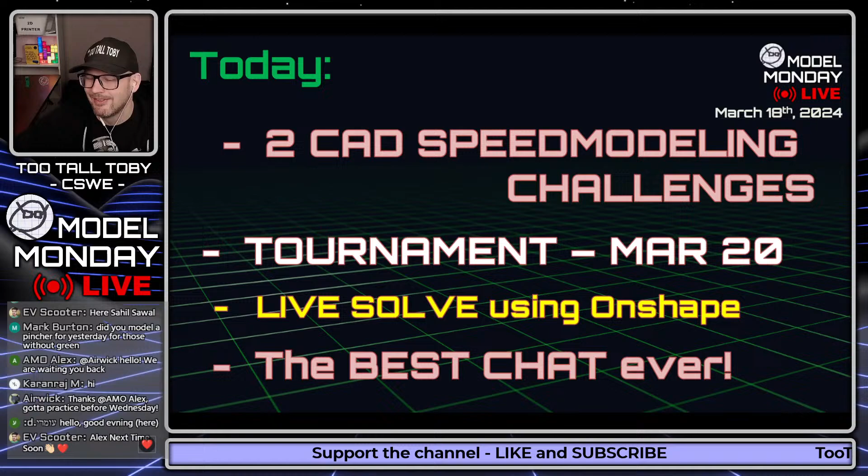Today we're going to do 2 CAD speed modeling challenges. We're going to talk about the tournament this Wednesday. We're going to do some live solve using Onshape, very excited about that. And of course we're going to hang out with the best chat ever. You guys are indeed the best chat ever, so don't forget that as you go through your week, as you go through your month, you are indeed the best chat ever. So just remember that. All right, here we go.

Let's do this baby, the live solve, I'm going to do this one. This is the drill mount. We posted this in the practice models a couple of weeks ago. There were a couple of people who were asking about this. Jonathan said, love to see a tutorial in Onshape with this one. And BMNDJD said, I'm struggling with the placement of the 42 millimeter radius. So we'll take a look at this in Onshape today, we'll do a live solve in just a little bit.

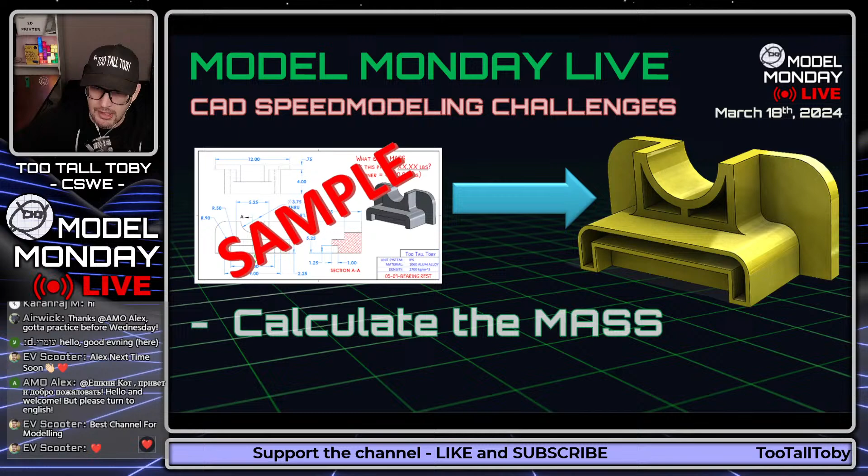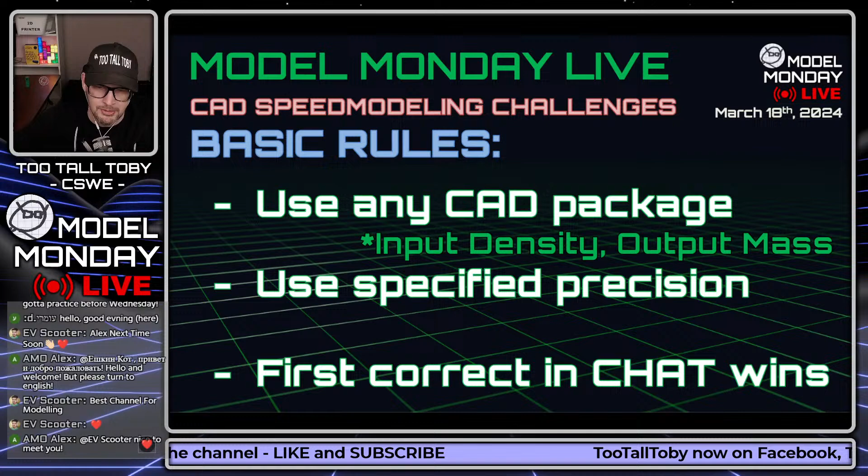But for you guys, I'm going to show you a 2D print and ask you to turn it into a 3D model. And you're going to try to calculate the mass and then enter that mass directly into the YouTube chat. Whoever is able to do that the fastest using any CAD package will be declared the winner. Make sure you use the specified precision, and the first correct answer in the chat will win.

These are the units we're going to be using today: IPS, MMGS, plain carbon steel, 1060 aluminum alloy, and ABS as the materials, and these are the densities. If you're here for the first time, take a screen capture of this page because you're going to need these materials anytime you do the practice models or the tournament.

EV Scooter says, SolidWorks Tricks Short is amazing. Awesome, glad you've been enjoying that.

Mark Burton said, been using your practice models to learn Alibre. Nice, very nice, we love the crew over at Alibre. There's a bunch of Alibre users here in the chat as well, regulars on the show, so I'm sure they'll be happy to answer any questions you have. You can also ask them in the TooTallToby Discord.

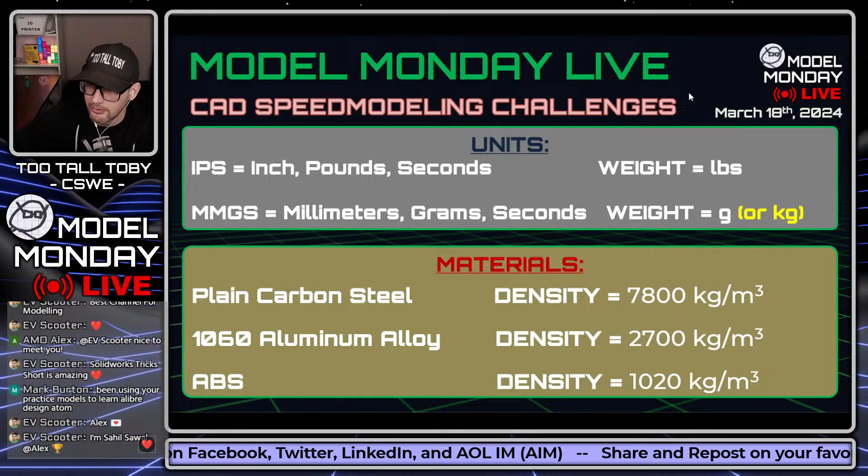All right guys, here we go, let's get into this first challenge. This is one that comes from the tournament, but that we didn't use, at least I don't think we used it. If we did use it, I hope somebody out there will say, hey Toby, your memory is not working good. Let me know. But I think this is a new one for all of you. Here we go, this challenge begins in 3, 2, 1, go.

What is the mass of this part in XXXX grams? Ross getting here just in time, we are just launching the challenge. Welcome, welcome. So what is the mass of this part in XXXX grams? The tolerance is plus or minus 1 gram.

Kind of a cool little part, it's a tier 4 part. There are some tricky elements to this. You have to locate that C-bore correctly, or else you're not going to be within tolerance because of how that lower face is slanted. So kind of a cool little part here. I think it's one of these parts that looks pretty easy at first, but it's going to take a little bit of thought to get all of your dimensions, all your features in the right places.

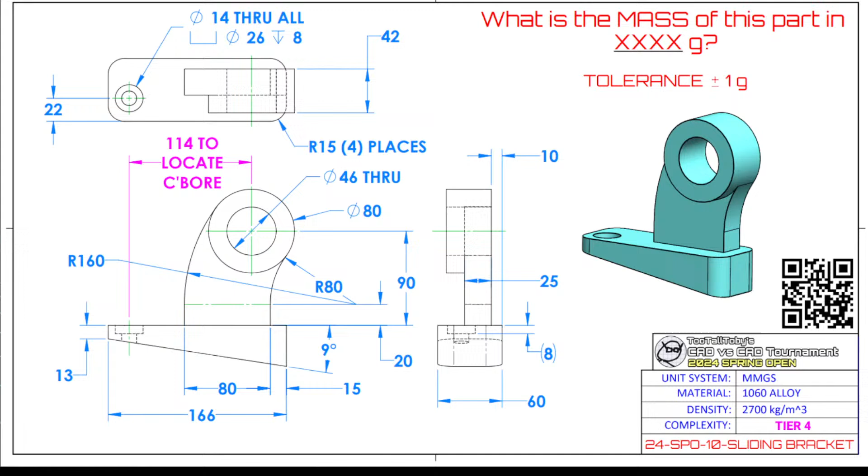So good luck to everyone on this. Take a screen capture, a 2D screen capture, use your Windows snipping tool, or use something to grab a 2D screen capture of this and put it onto your second monitor, and you can begin modeling. This is a model that was on the wheel for the tournament during the round of 16, but never got picked. Sad, it never got picked. But it's happy for us, it means we get to use it here in Model Monday Live. So take a look, good luck, take a screen capture, put that on your second screen.

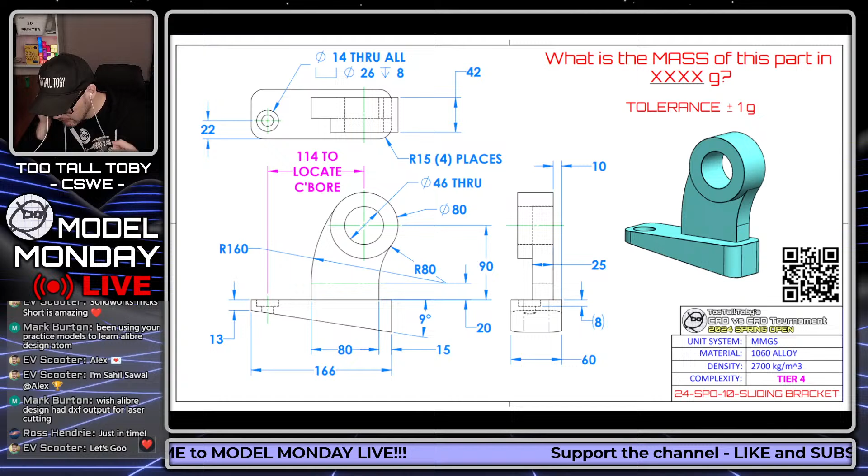And we are going to get back into the action here. This song gets me pumped, I hope the music sounds good. Let me do a quick audio check here on my second. The music can maybe be a little louder, let's see if we can bump this up a little. We're doing a lot of stuff here, we're wearing several hats on this live stream. I think that's probably pretty good right there, I like that, I like that sound, I like that level, it's a good level.

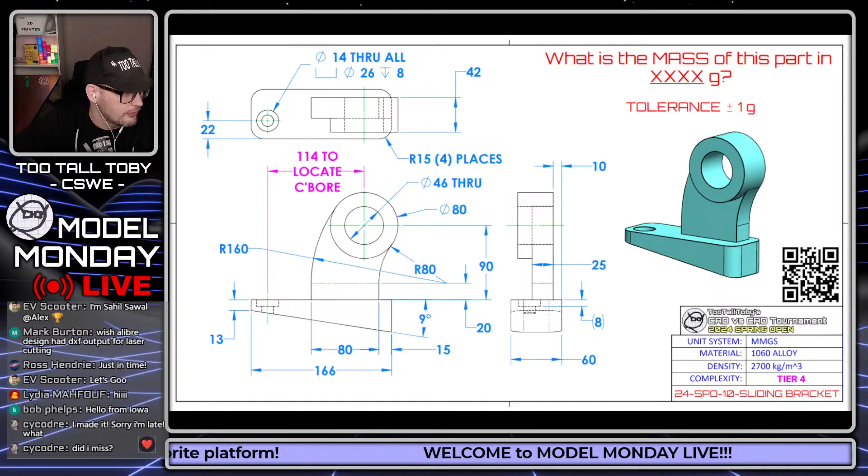No problem, what did I miss? Not much, just the first model. I'll show it to you real quick, you can grab a screen capture, just for you, special for you. Take a screen capture and you can try to model that using any CAD system that you want. I'll leave it up for 5 more seconds while I take a sip of my water.

Wow, Victor K already coming in with an answer. Victor K is the world champion of 3D CAD speed modeling. It's Andre. What's up Andre? Welcome, thanks for joining us.

All right guys, let's talk about some news in the world of TooTallToby, the next tournament. So obviously the tournament is concluding this week, March 20th, the finals. Huge congratulations to our Final Four. We got Imants versus Dom in the first match, and then we got Airwick versus Chrisbco in the second match. Very, very cool, so huge congratulations to our runners who made it to the Final Four.

When is the next tournament? We're not going to do a summer tournament. We had some internal meetings here at TooTallToby Labs, and we decided that we're not going to do a summer tournament. We're going to just wait and put all of our efforts into the World Championship 2024. We were planning on maybe stacking a quick summer tournament in between the two, but it just feels like it's rushing a little bit too much to jam one additional tournament in the middle there. We figured it'd be better off putting all of our effort into getting ready for the World Championship this year.

So be on the lookout for that World Championship, be on the lookout for the registration, the qualification. We'll see all that stuff going up in the next couple of months. Between now and then, what you can do is go to TooTallToby.com and go to the leaderboard and practice the leaderboard. There's a March leaderboard up right now.

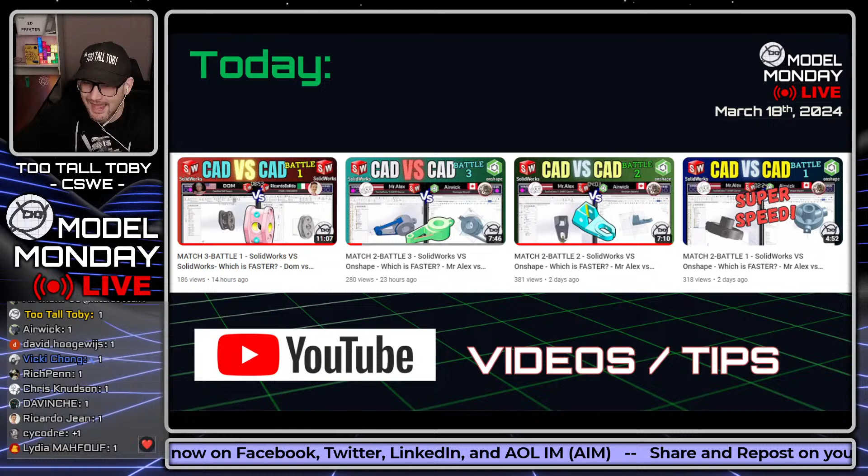For the past few days I've been posting all of the episodes sequentially of just the battles from the Elite 8, starting with the very first match and going all the way through. I'll finish up tomorrow posting the final battles. All of the Elite 8 battles are posted on one playlist on the TooTallToby YouTube channel. It makes it a little more exciting to see what's going to happen on Wednesday as we enter the Final Four.

Someone mentioned the shorts in the chat. Yes, the shorts are epic, we're on day 63. We've been doing a new short every day with SolidWorks tips, really CAD tips - it doesn't all have to be SolidWorks. There's going to be other tips in here too, Onshape tips, Alibre tips. It's just all SolidWorks right now because I've acquired a huge library of tips and tricks for SolidWorks, and I'm trying to get them all out there to make your life a little easier.

Ross in the chat says, gotta love a SolidWorks crash. Yeah, I'll bet you do. Something I never seem to miss when I'm working in Onshape - I never seem to miss the SolidWorks crash, losing my work. Doesn't really happen in Onshape. Everything you do in Onshape is insta-written to the database essentially, so if your whole computer has a catastrophic meltdown, you can just jump to the next computer and you'll be right where you left off. It's pretty awesome, there's no save button.

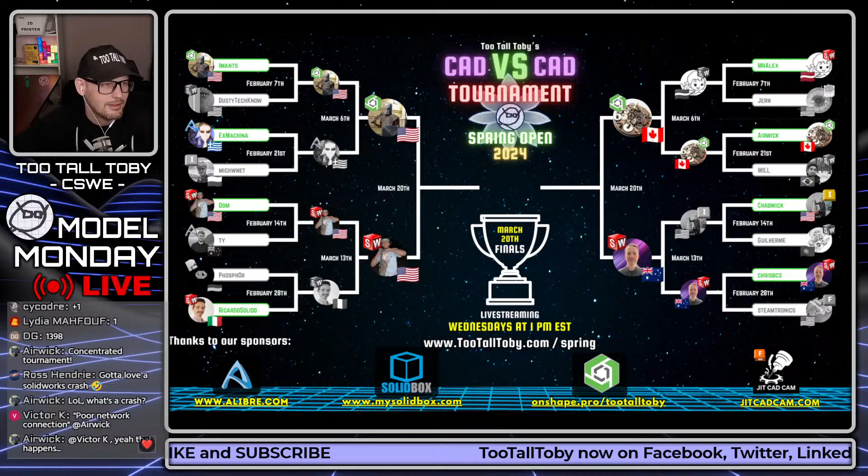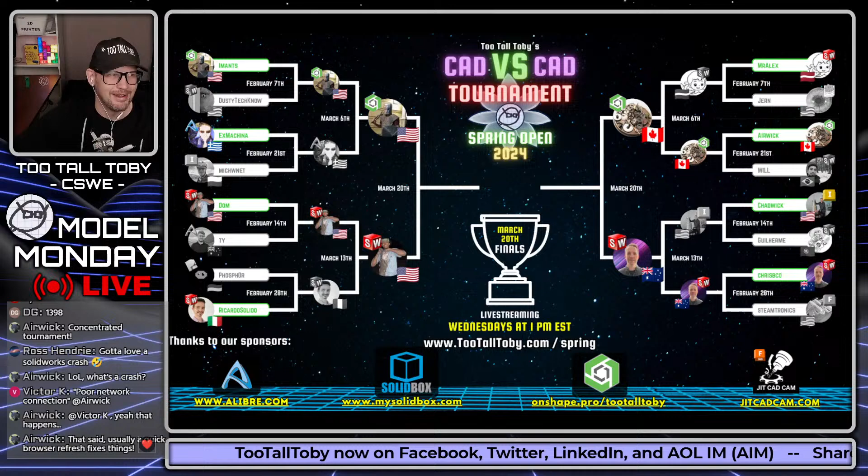Will it be a clean sweep? Will one CAD system completely defeat the other? Who knows, we'll see what happens. Or are we going to see a SolidWorks versus Onshape showdown in the finals, which we've seen before - we saw that 2 years ago in the World Championship. So we'll see what happens here. It's going to be awesome. I'm very excited, I couldn't ask for a more exciting batch of people to be in the Final Four.

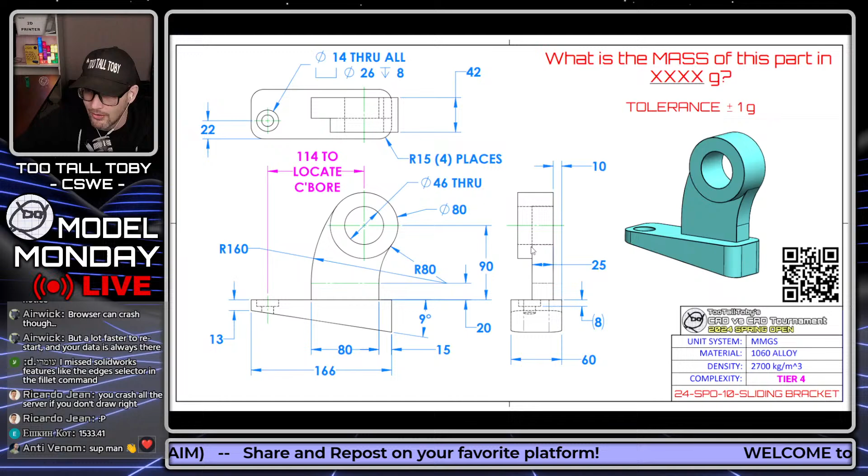Let's take a look at this first answer. Anti-Venom in the chat, what's up my man? Long time no see. Welcome, welcome.

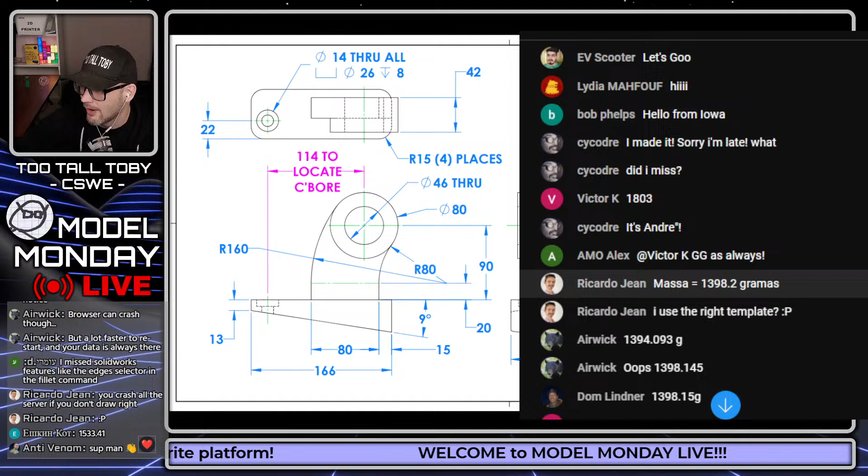Let's see how we did on this first one. Looks like it was Victor K who came in with the very first answer, 1803. Victor K is the world champion of 3D CAD speed modeling and he is continuing to dominate. Ricardo Jean coming in, 1398. Ricardo Jean put in an outstanding performance last week, but suffered a real heartbreaker with regards to a little unit issue, creating a model in millimeters that was designated as being in inches. And how many times have we all done that? I know I've done that plenty of times myself. So that was a real heartbreaker, but Ricardo Jean is very fast, one of the strongest competitors in the tournament.

1398, very nice. Airwick, 1394. Airwick saying oops, 1398. Dom, he's in our final. Airwick and Dom are both in our final 4. 1398, Victor K, 1398. Oh, Victor K revising, I like it. Somehow put 19 degrees instead of 9. Dope. All right, let's see here. DG, 1398, very nice. Omri coming in here, 1398, very nice, very nice.

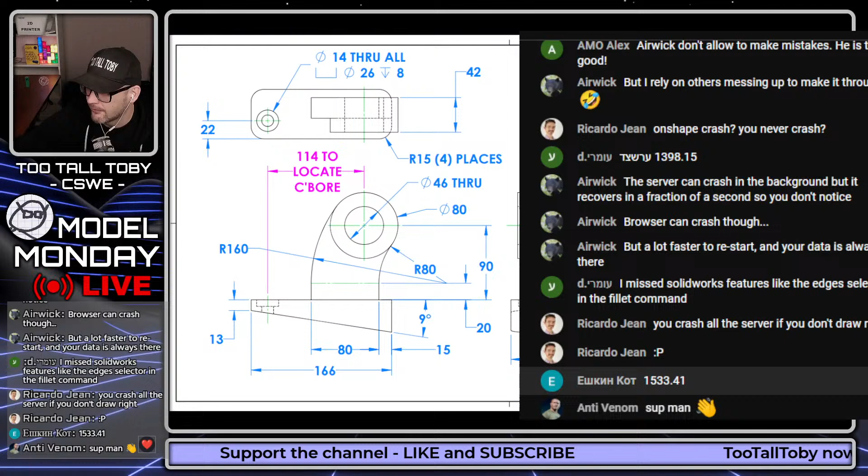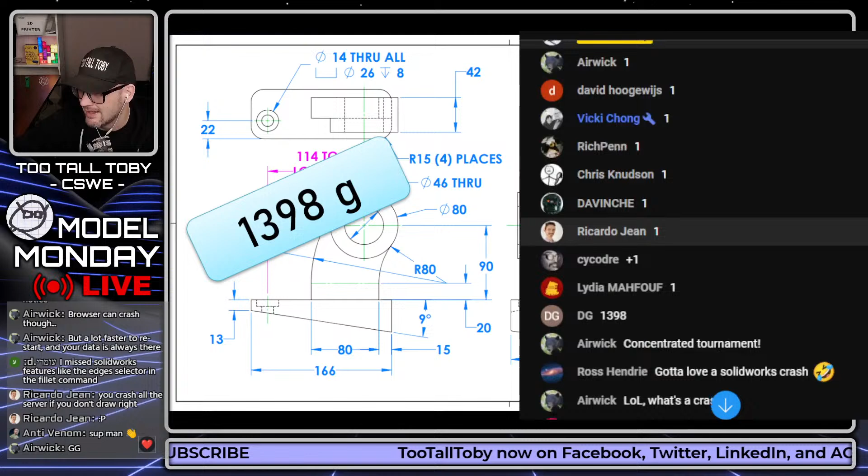And our friend from Russia, 1533, very, very nice. Anybody who got through this model in that short amount of time, very impressive, very well done. But there can only be one winner, and that winner looks like Ricardo Jean. So GG to Ricardo Jean, 1398 is the correct answer. Let's see here, here he is, Ricardo Jean, very nice, mass of 1398. GG to Ricardo, he earns a point for this matchup. Well done, well done, very nice.

And good job to anybody who finished that model. That's a tricky model, not easy. Congratulations on doing that model.

But it's not over. Oh, Rock Crawler's here. Rock Crawler, what's up? Sorry about logging into that other stream at the start. I saw you in there at the beginning, you were like, hey, why is everybody over here? So yeah, good job, we fixed it. We made it, have a meeting but we'll try to multitask.

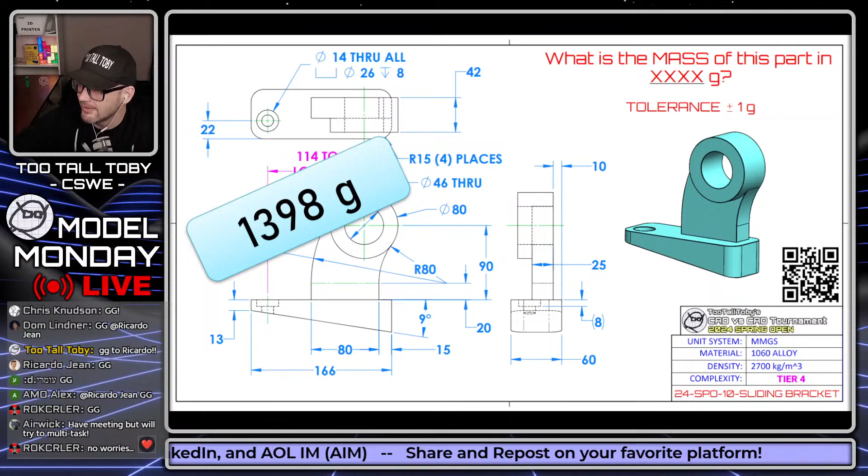Okay, that's what I like, Airwick. All right, let's get into the next one then.

Here we go, challenge number 2 for this episode of Model Monday Live. Who can model this as fast as the fastest person? Begins in 3, 2, 1, go. What is the mass of this part in XXXX grams, tolerance plus or minus 2 grams? Now this part, you may notice in the title, is 24-SPO-40 rod mount. You guys may have been wondering what was SPO-40 - it was this one, a brand new model for the tournament, never seen before. Kind of a cool little model here.

What is the mass of this part in XXXX grams? Tolerance is plus or minus 2 grams. This is made from 1060 aluminum alloy, 2,700 kilograms per cubic meter. What is the mass of this part? That is the question for all of you.

And we'll see who can figure this out, who can figure it out the fastest, who can use some cool tricks to get this one correct. A little bit tricky with this one, that's for sure.

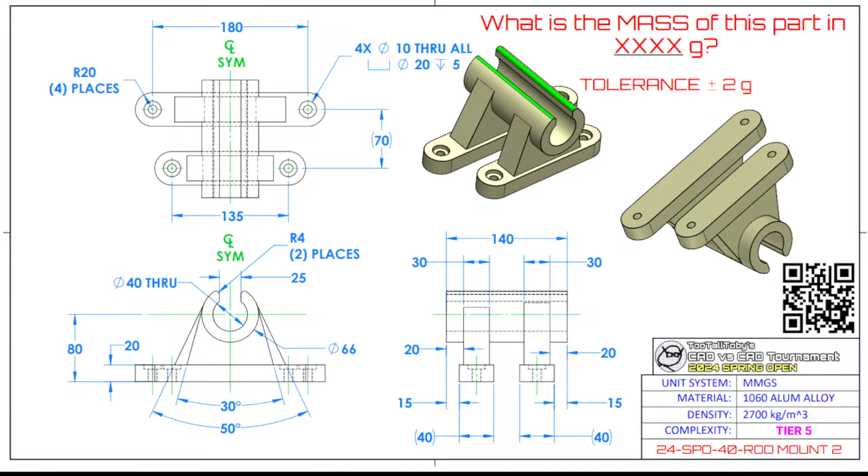All right, I hope that was enough time for everybody, because we are going to move on with our presentation. We're going to get into a little bit of a live solve here. I want to make sure I give myself enough time to solve this.

So we're going to do some 3D modeling here in Onshape, and the model that we're going to create is going to come from our practice models challenge from a few weeks ago. What is the mass of this part in XXXX grams? The tolerance is plus or minus 2 grams. This part is called drill mount. It's a tier 5 part, so not easy, not an easy part.

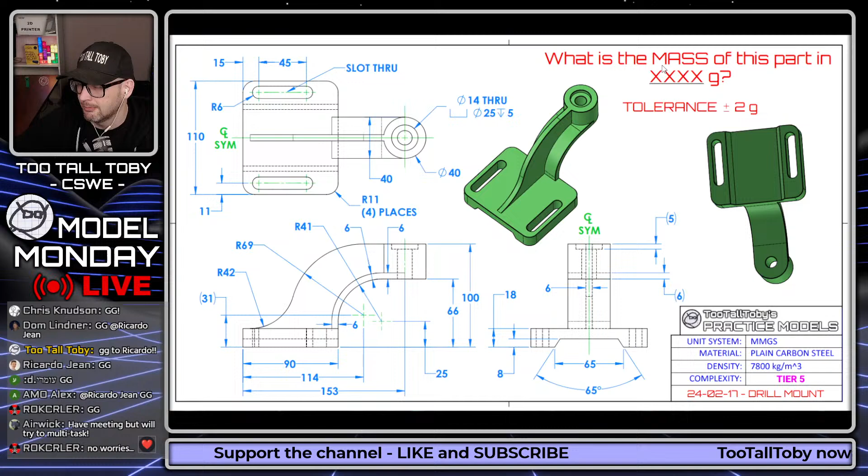So let's get into it here with some Onshape live 3D modeling, and we'll see if we can solve this model and come up with the correct mass. What is the mass of this part in XXXX grams? Tolerance plus or minus 2 grams, and this is in plain carbon steel, and the density is 7,800 kilograms per cubic meter.

So one thing that I get asked a lot is, what are some strategies, what are some techniques you use to become faster and faster at modeling? And one of those strategies would be to discretize the model. What I mean by that is look at your models and think to yourself, how would you break this model down into different sections or different features?

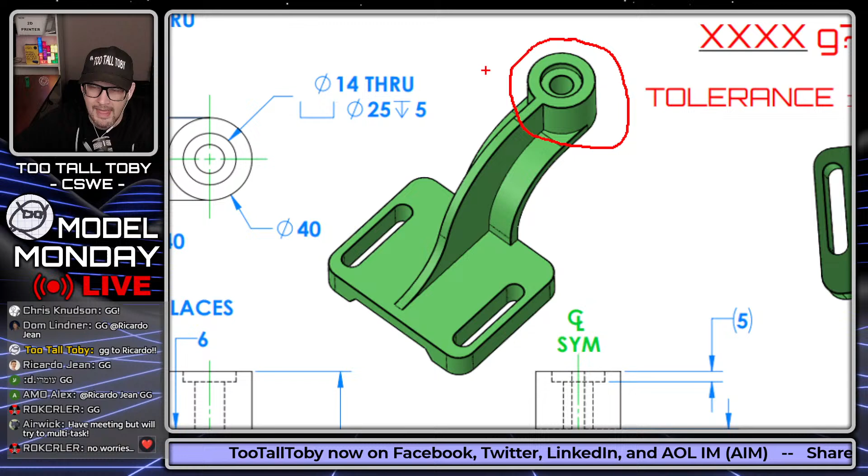So without even knowing anything about 3D CAD, you might say that this section up here, the upper section with the counter bore, that's going to be one section. This section down here, the main plate at the bottom, that's going to be one section. And then this section here, the rib that's kind of like a transition between the two, that's going to be one section. The more you practice breaking down your model into different areas, the better your strategy is going to be for creating that model.

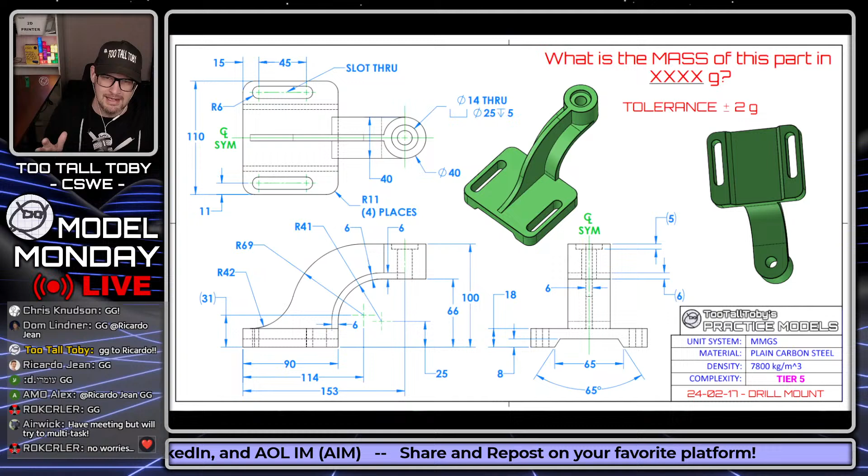So it's good to look at the model as a whole, but also get in the habit of breaking it down into different sections. This is also a lot of times how we create things in mechanical engineering, because it makes it easier for us to make changes when you've got these discrete areas of the model.

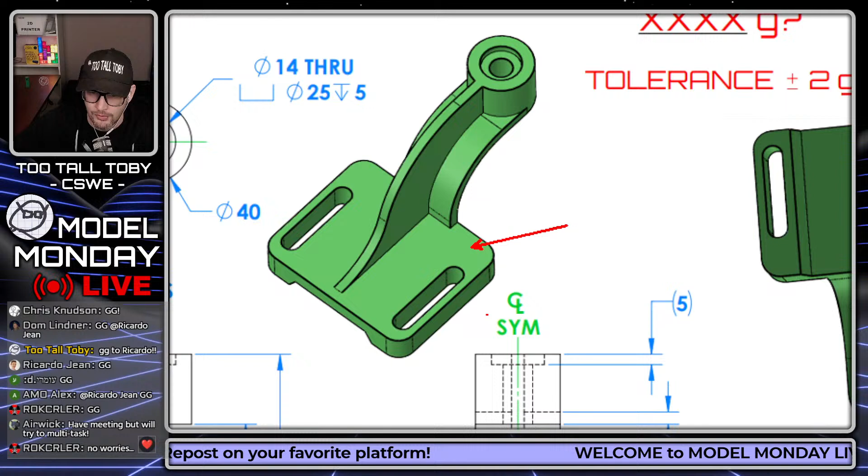So then what you have to do is figure out what order you're going to build those features in. That takes a little bit more experience, a little bit more practice. But I think that for me, the order that I would create this thing in is I would start out by just creating a rectangle, just a regular rectangle for the base plate. Then I would create a revolve here.

Now you could do this as an extrude or as a revolve. I just think it's going to be easier because of how the dimensioning is done to do this as a revolve. And then I would create the vertical, the taller vertical rib here. And then I would finish off by creating this rib that's kind of sticking out here. And I say finish off because that's going to give me all of my solid geometry.

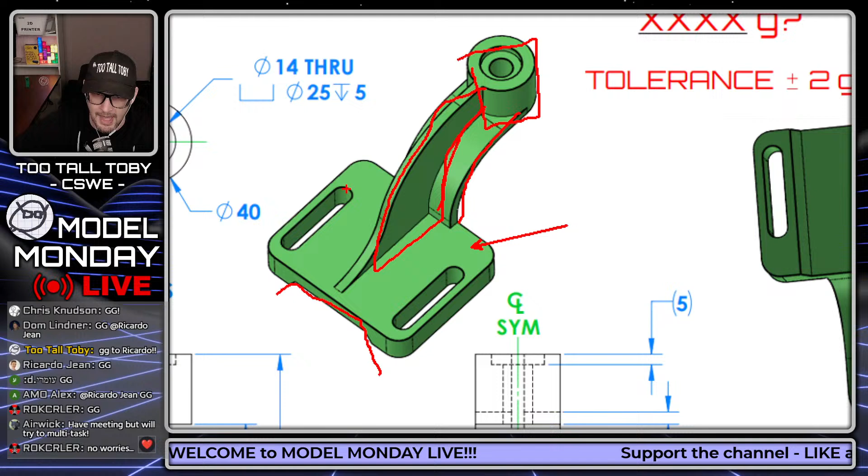So I'm going to start out by creating all my solid geometry. And then after that solid geometry is created, I'm going to be pretty comfortable going in and adding this cut extrude on the bottom, adding these slots here, adding this C-bore up top here. So after I do all my boss extrudes, I'll do my cut extrudes. And then after I'm done with my cut extrudes, then I'll finish off with any final fillets or anything.

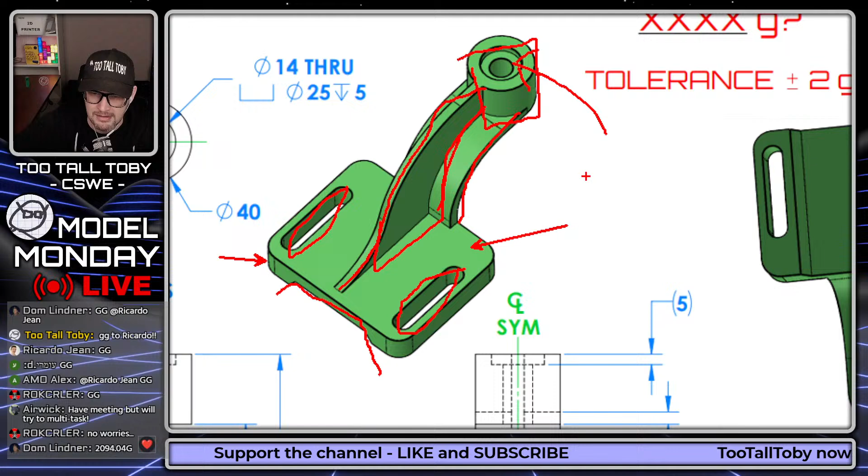And then get those sections out of the way and correct first, and then go back in and add the fine details. So that would be my advice to anybody who's been asking, do you have any advice for how to approach these kinds of models, how to become a model mania wizard, those types of things. That's kind of the best advice I can give you.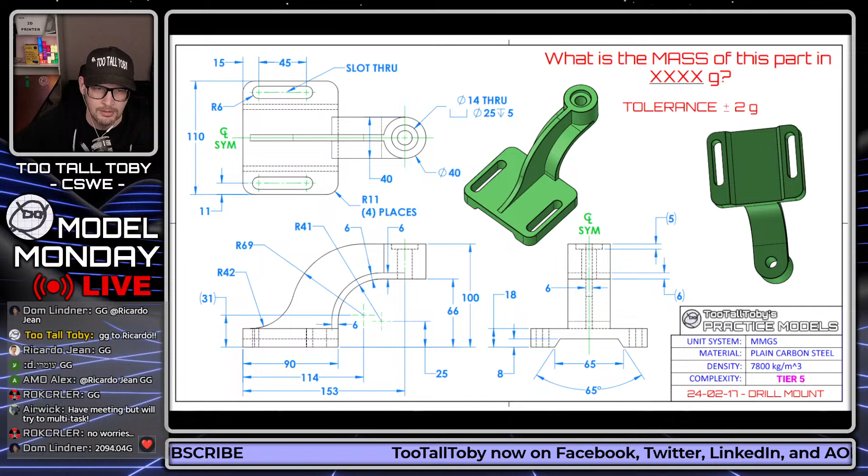Look at the whole model, discretize it into different areas, and then when you're done, go through and start modeling. Start with your bosses, and then add your cuts, and then add your final details, your drafts, your fillets, and things like that.

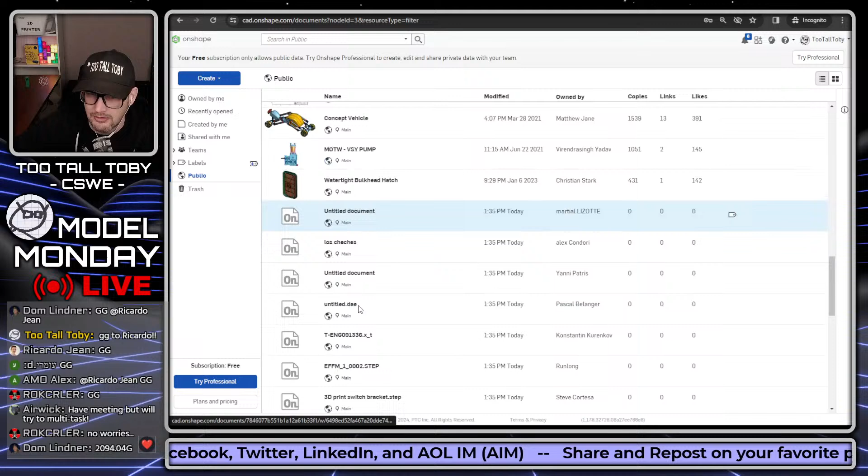You could sign up for a free account, and when you sign up you're going to be able to create whatever you want, but everything you make is going to be in the public space, which means anybody can search and find your documents. That's kind of cool because you can easily search other people's documents if you need components for your assembly. But just be aware this is really meant for users trying out the software or learning how to use 3D CAD, not for professional environments, because you'd be exposing all your work to the world. But it's totally free, and it's a great way to get people started, get students started, or even yourself learning a new CAD system.

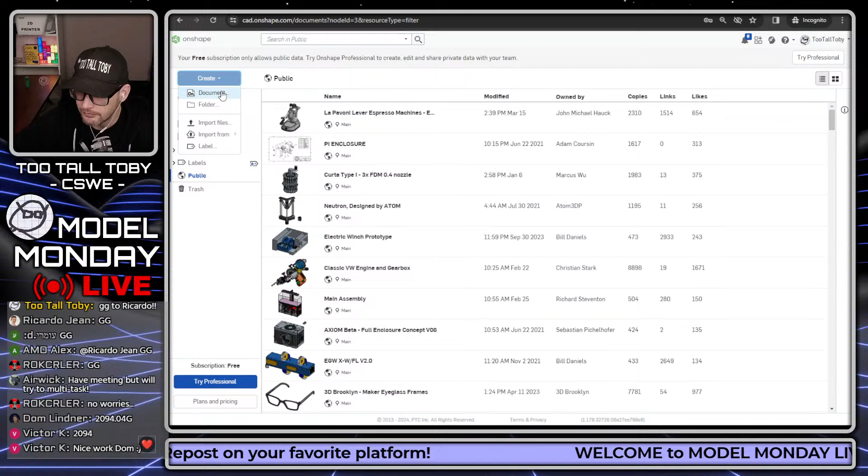If your team is ready to do Onshape together, check out that link I showed earlier, onshape.pro/TooTallToby. So I'm going to create a new document and call this 24-02-17 drill mount. Because this is a public document, you can search for it, so if you were asking for a tutorial, you could search and find this one.

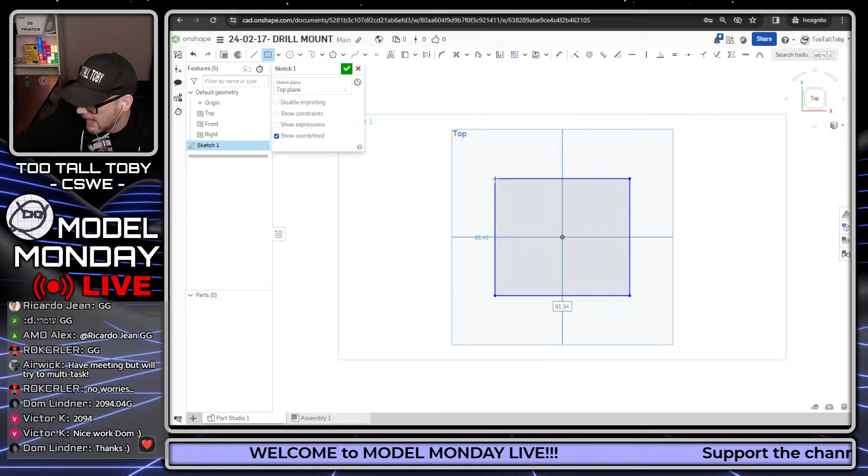I'm going to go to the top plane and begin a sketch, using the S key on my keyboard to bring up that menu. I'll sketch a rectangle here and give it the dimensions shown on the print. It looks like this is 90 in this direction and 110 in this direction. Whoops, looks like I missed my zero there.

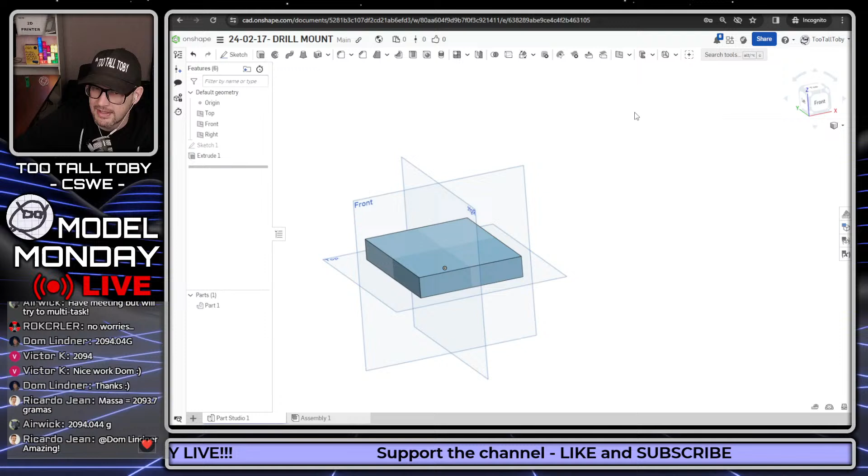Now I'll use the S key and turn this into an extrusion, coming up to a height of 18 millimeters. So there we go, there's our first feature. Again, kind of discretizing this model into different sections to break it down and make it a little easier.

On the front plane, I'm going to begin another sketch. For this second sketch, just like we talked about in the game plan, I'm going to create this as a revolve. So instead of sketching that cylinder as a circle and extruding it to a height of 100 minus 66, I'm going to create a radius here of 20, and then the height here is going to be 100 minus 66, and there we go.

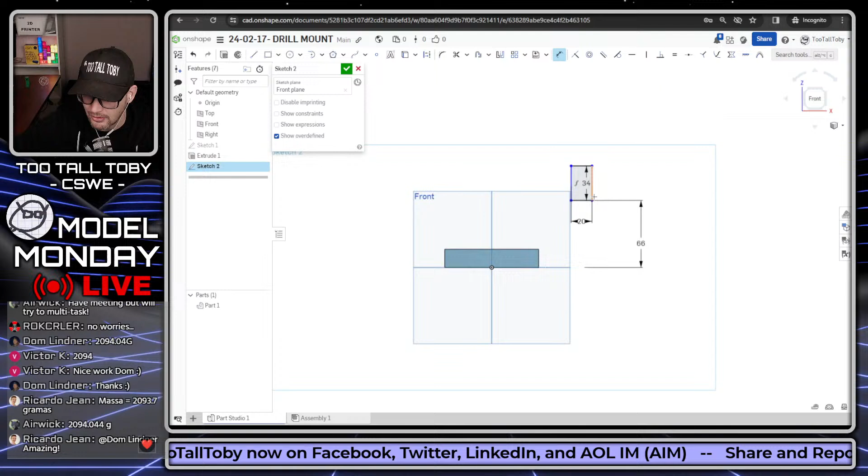Now all I need to do is add in my final dimensions. The dimension from the base here is going to be 66, and then the dimension from this end of the model to the center of the cylinder is going to be at a value of... whoops, I think I S-keyed and turned it off. It's going to be at a value of 153. So that's the center of the cylinder.

So now I could go revolve, and for my revolve axis, I can choose here, the center of the cylinder, and there we go. Now we've got two of the features from this model. You discretize the model, break it up into different features, and then one at a time start making those features.

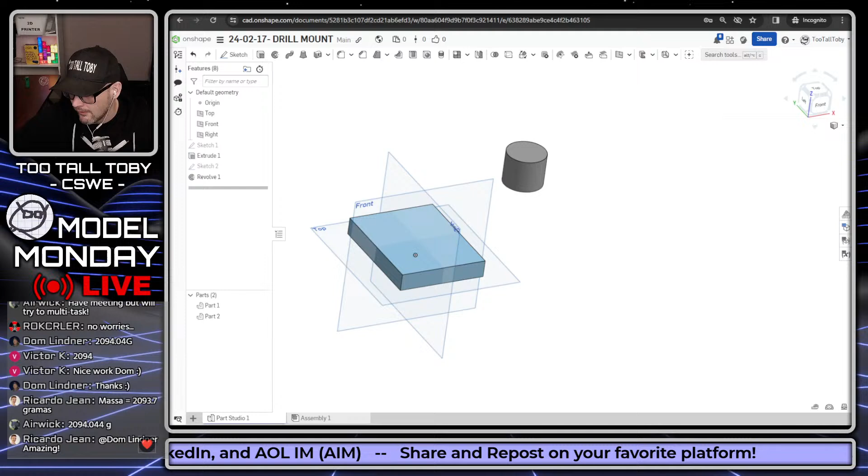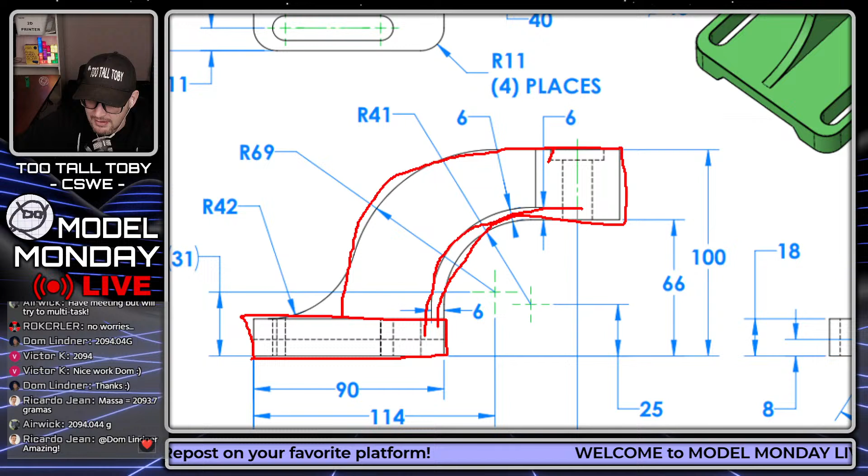Now, of course, there's other techniques. A lot of the Onshape users I've seen are very comfortable sketching the entire shape all at once. There's plenty of Onshape and SolidWorks users in the chat who would go through and create their first sketch looking something like this - creating this shape, then this shape, adding an extra line with an offset, creating this shape like this, and then like this - ending up with just a single sketch they could use over and over again. And that's fine too, that definitely works.

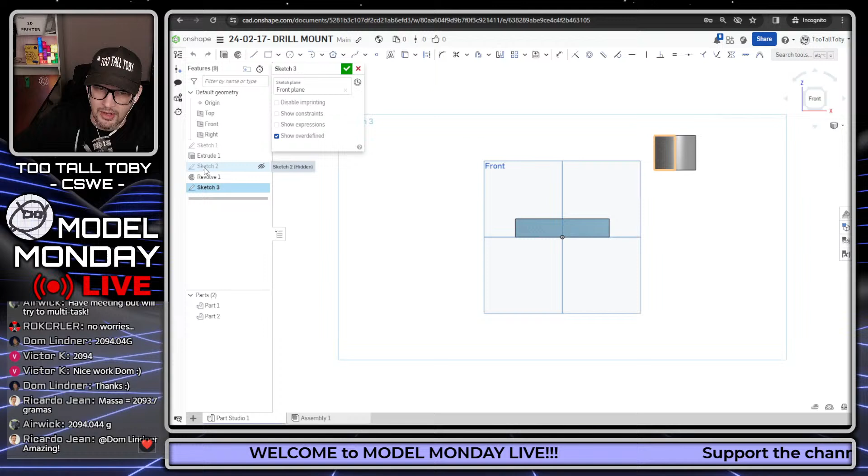I just prefer to break it up and do them one feature at a time. It just makes it a little easier, especially when the customer comes back and says they need to make changes. So now on the front plane, I'm going to begin another sketch, and this sketch is going to reference the previous sketch I created for the revolve. I'll show that previous sketch, I think that will make it a little easier for me.

So now I can click here on this first line, come over with the horizontal line, come back, touch the endpoint, come off of that endpoint and drop an arc. And then I can right away give that the radius value of 41. And then I can just make a vertical line here. Basically, this vertical line is just going to come down to this corner here, I think.

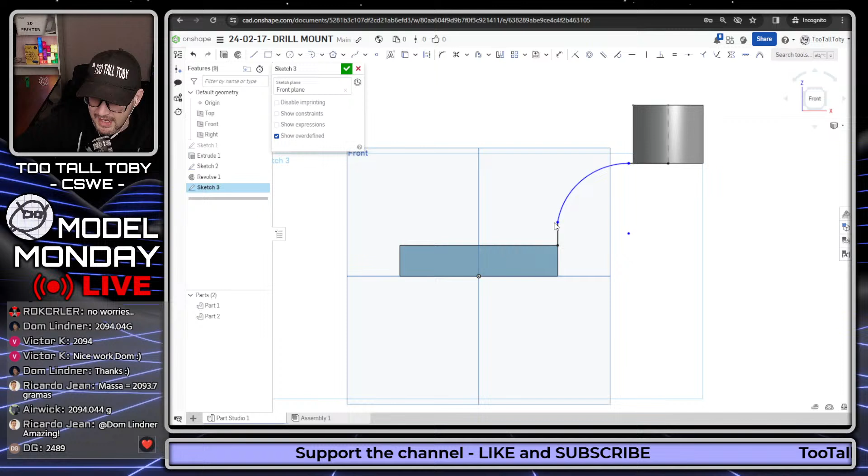So these guys are going to be coincident. Just pick those two and press I. And then these guys here are going to be tangent, so I could maybe just do a little crossing there over both of them and then press T. And look at that, that geometry went nice and black. That's what I like to see.

And so now for that other arc, I'll basically do the same thing. Come back, touch the endpoint, come over here with an arc, click in the background, and I'll say that's got a radius of 69. Nice. And then I can just make a vertical line here and bring another line over to here like so, and then just kind of hook those two together.

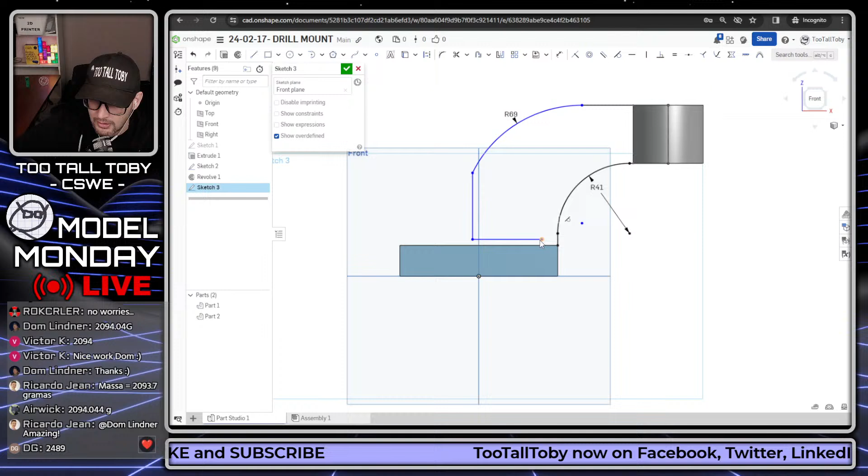And so now these are going to be tangent. So once again, I can do that kind of crossing trick, select both of those and press T to make those tangent. And then this one, it's kind of weird - it's got a dimension from here to the center of the arc, and that dimension is 114. And that's kind of the tricky part - that's the part you're probably going to struggle with the most, is getting that 114 locked down.

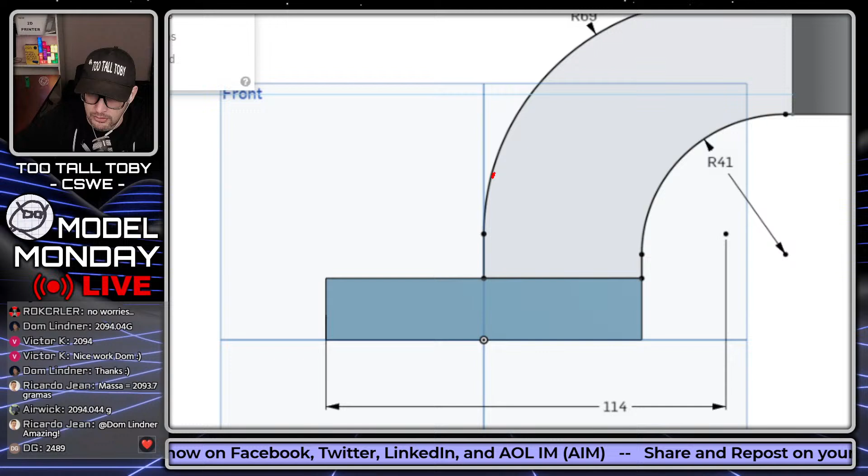Now, you could at this point also include that 42 millimeter dimension if you wanted to, but I don't think I'm going to do that. I think I'll just come back in after the fact and create that 42 millimeter with a fillet.

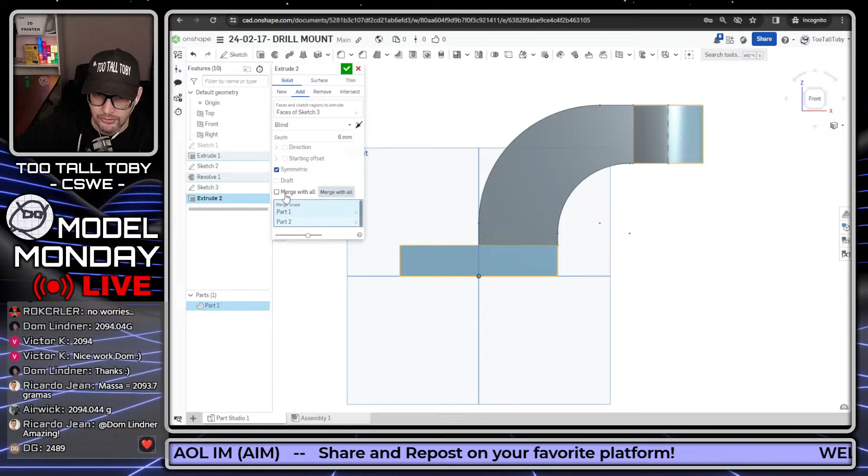So now at this point, we can go into extrude, and I'm using the tab key here to get through this menu. That rib is 6 millimeters wide, and then I'm going to go down here to symmetric, and this is going to be an add, and I'm going to add it to this and this. I also could have just done merge with all there, I guess. Merge with all. So there we go, merging that into those two, and that looks beautiful.

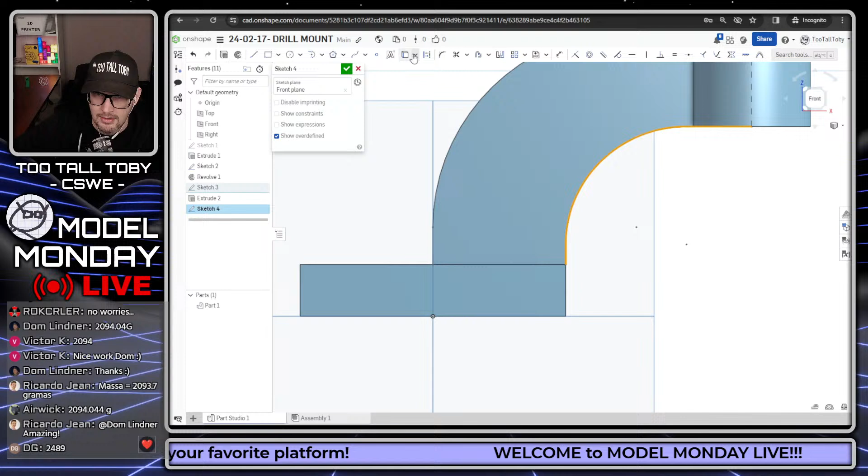I love it. And so now we're going to go front plane again, begin a sketch. We're going to orient the view. And then we could show that previous sketch again, because then we could kind of reuse that geometry from the previous sketch. So I could take this and this and this, and then I could do a use, like it's kind of like a convert entities.

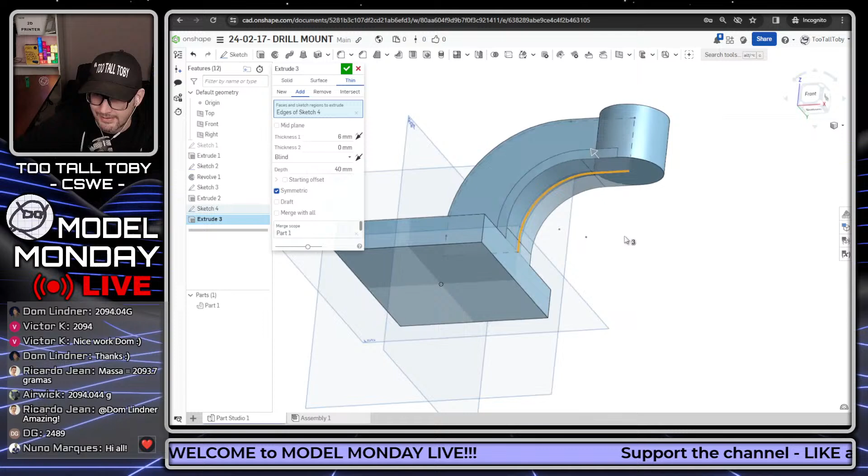And then we do have a thin feature coming out of Onshape. I never tried using it with thin feature here before, but let's see what happens. So if we do thin feature, and then we say we want to use this sketch, and then we say we want that to have a thickness of 6, and we want it to be to a depth of 40 and symmetric. Guys, I think that looks like a winner. That looks like a winner to me.

So we're going to hit the green check mark there. Boom. That gives us that shape. That looks awesome. And so now it's just a matter of going back through and adding in those final cut extrudes like we talked about. So the cut extrude, might be this face here, begin a sketch, orient the view, and I could create an angled line that comes over here, a line right to the middle, come down to the origin here.

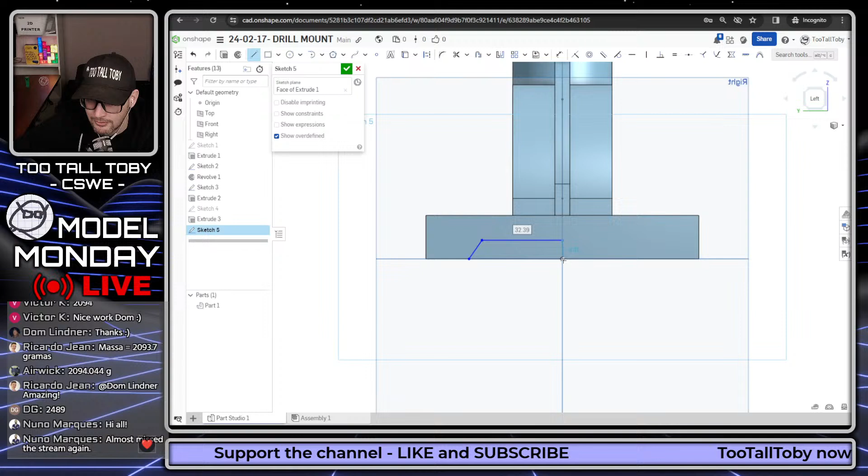This is a little trick that I've seen some of the Onshape users do. Even though this dimension looks like it's like 8.26 or 6.26, something like that, when I click down here on this lower point, I can let go of my mouse, and then I can type in what that dimension is supposed to be. So it's supposed to be 8. So I press enter, and that is a nice little time saver there because it makes sure that dimension is just kind of right there, even though that wasn't the actual dimension.

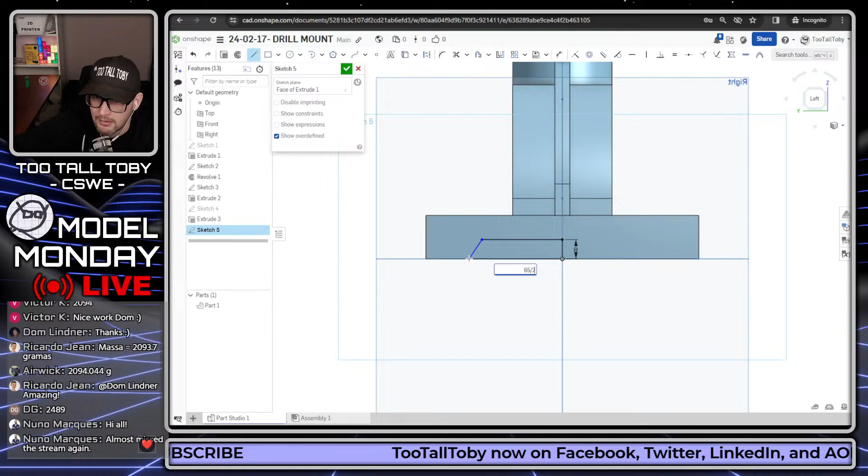Like this one here, you'll see it more. This is supposed to be 65/2. So I type in 65/2, and then it just pulls the value right to that location. Really nice time saver. Shout out to all the Onshape users who do that - that definitely helped me learning that.

So I'll make that line construction, and then I'll just do a window here and mirror that geometry across, and then I'll do one final dimension here for the angle here. This is 65, and there we go. Take that and turn that into an extrusion.

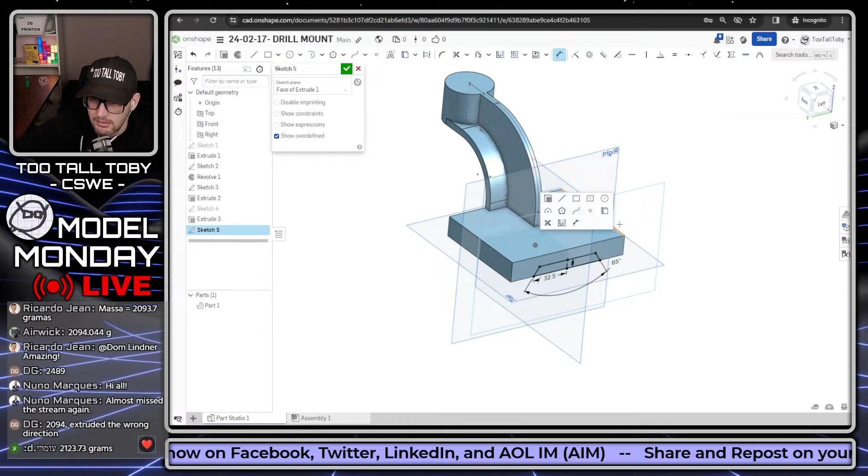That's going to be a remove, and we're going to go through all. Whoops, let's get back to solid for that remove. I've got to get better at switching between those different extrude types and not losing my selection. I always feel like I lose my selection in that workflow.

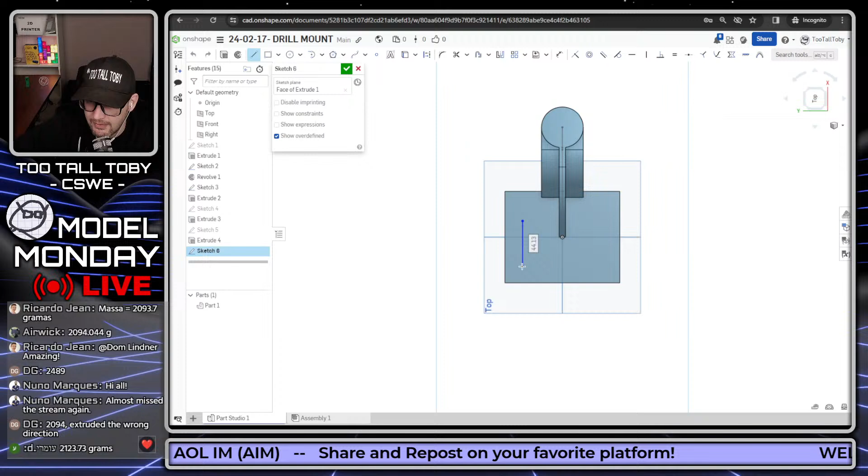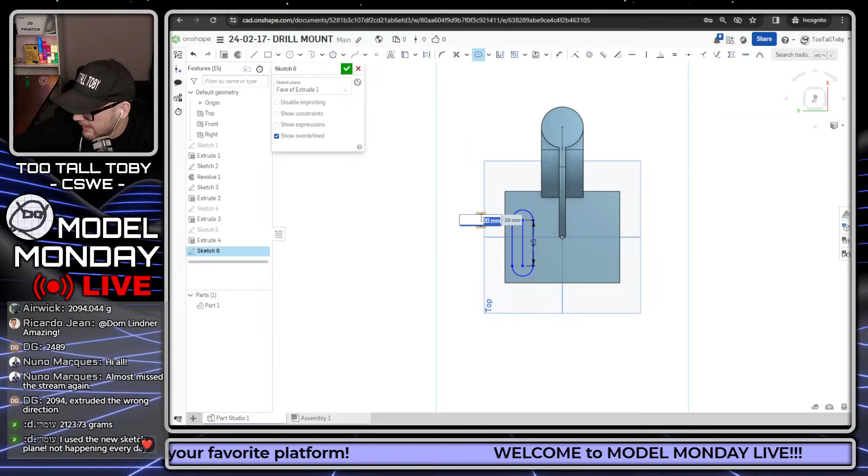Now I'm going to create a line here with a distance of 45, and then select that line. Up here where we've got our offset entities command, we've also got our slot command in Onshape. Usually you start with a line, then once you have that line sketch, you go up to slot, and that lets you offset that slot to a set distance. We could offset that to radius 6, so that'll be 12 for that diameter.

Now we just need to put in those dimensions. So a dimension here of 15, and a dimension here of 11. And then we could do another construction line, so I'll press Q to give myself a construction line. I know you don't have to have that construction line, but I just like having it. It makes it a little easier to quickly mirror. Making these into construction is really just an old habit.

Probably don't have to do that in Onshape, but now we're going to turn that into a cut extrude. We'll do that as a remove, going through all. What do we think of that? I think that looks pretty darn good.

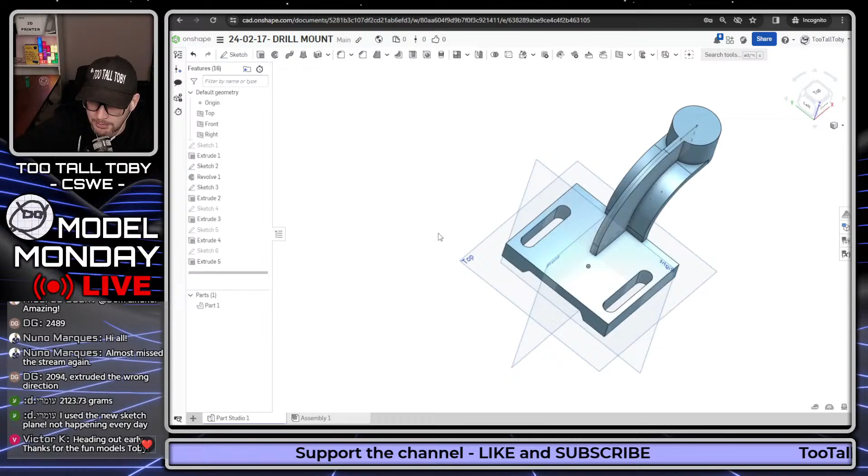Now we could do a hole. We come up here and do a hole, using the option for mate connectors. It's a good way to pick up the center of a cylindrical face like that. This is going to be a counter bore, and it's going to utilize the dimensions 14, 5.

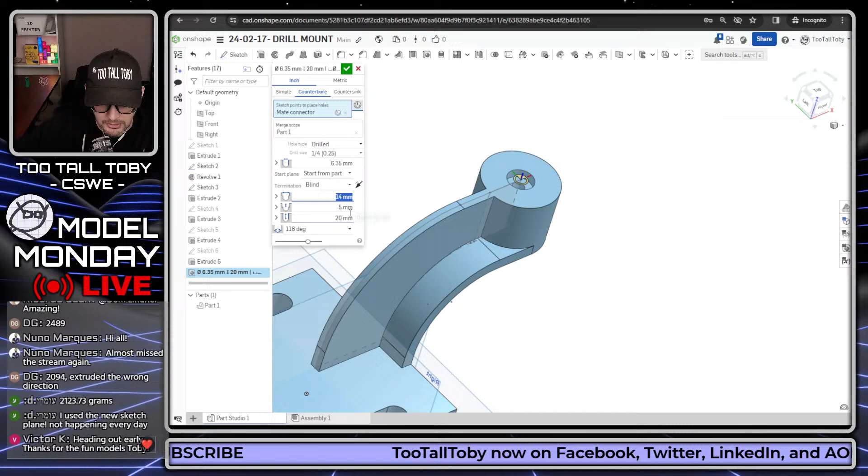Wait, what am I doing here? That's going to be 25, 5, and this is going to go through. And that one's going to be 14. Okay, 14, 25, 5. Yep, there we go. That looks good. Oh yeah, that looks real good.

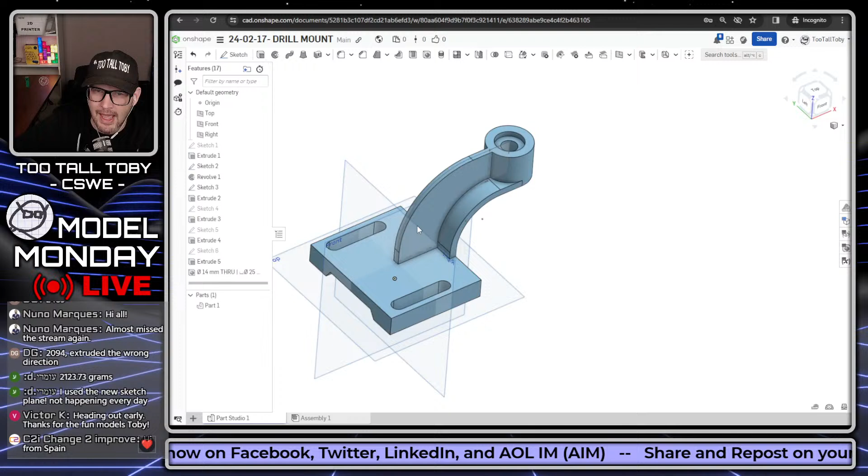Now we've got our fillets to wind this thing down. There's going to be a fillet here at 4 2, on this edge. And that looks good. Remember, you can do Shift-Enter and that'll take you right back into the same command. Then I could make this one a radius of 11, for these 1, 2, 3, 4 corners. And with the check mark.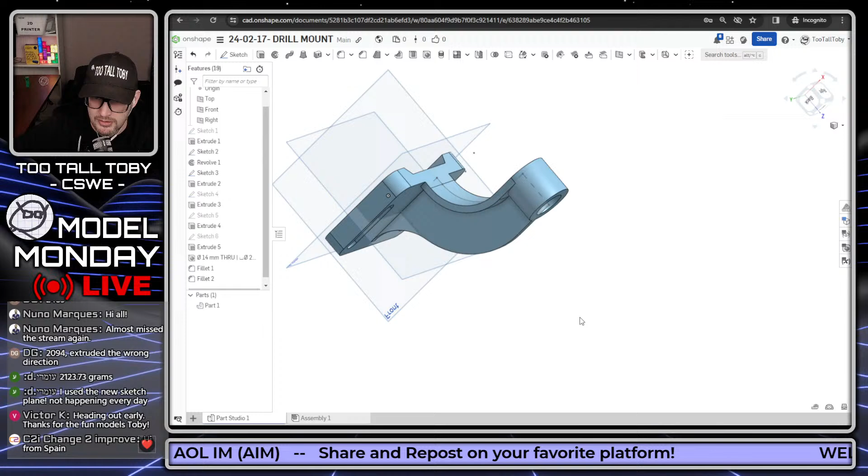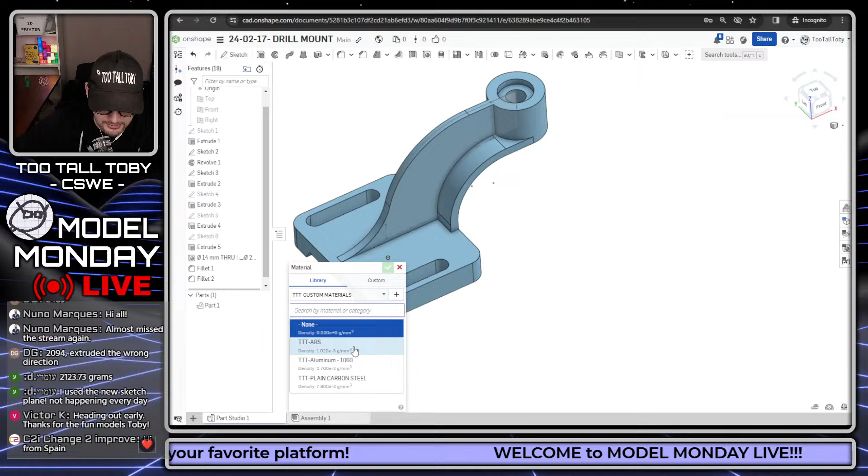That is how I would approach that part using Onshape. So the final steps would be to right-click on the name of the part, choose Assign Material. Once we choose Assign Material, we can go to my TooTallToby custom materials, select plain carbon steel, check mark, and then go into mass properties and click on this body. We can see that we are coming up with a mass of 1490 grams.

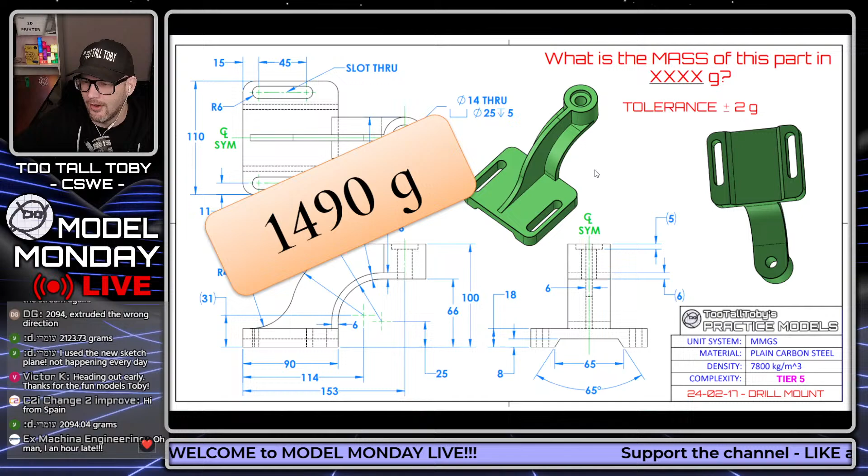And so if we return to the PowerPoint, did we get it correct? Oh yeah, we got it correct, baby. First try, that's what I'm talking about. So that is the workflow for creating this model using Onshape.

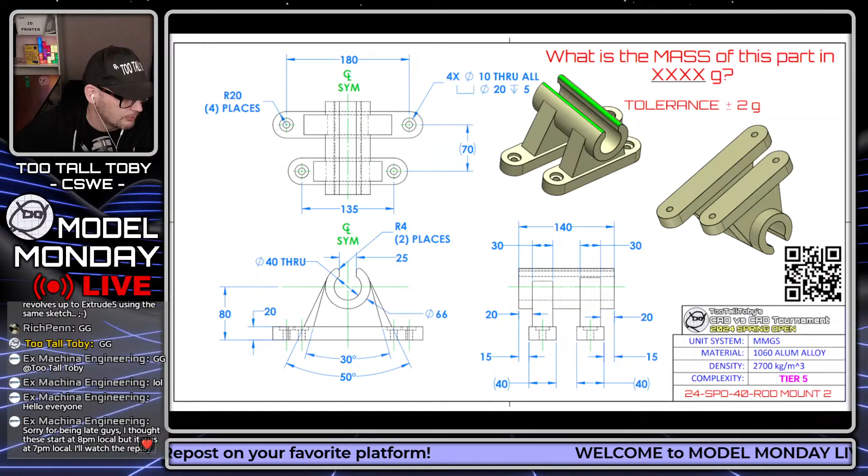All right guys, let's see what the answer is to challenge number 2. We had a lot of people participating in this one, so this was a good one, a very good one here. Kind of a fun model. There's something kind of cool you can do with this model in SolidWorks, actually. Maybe we'll talk about that in a future power move.

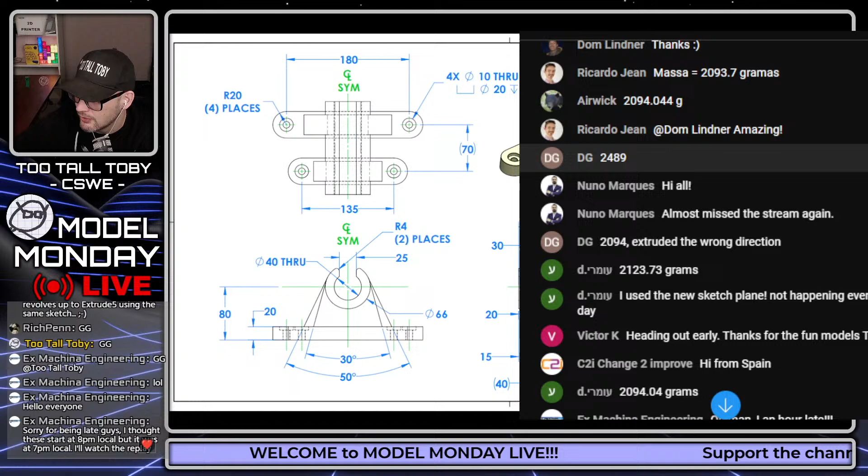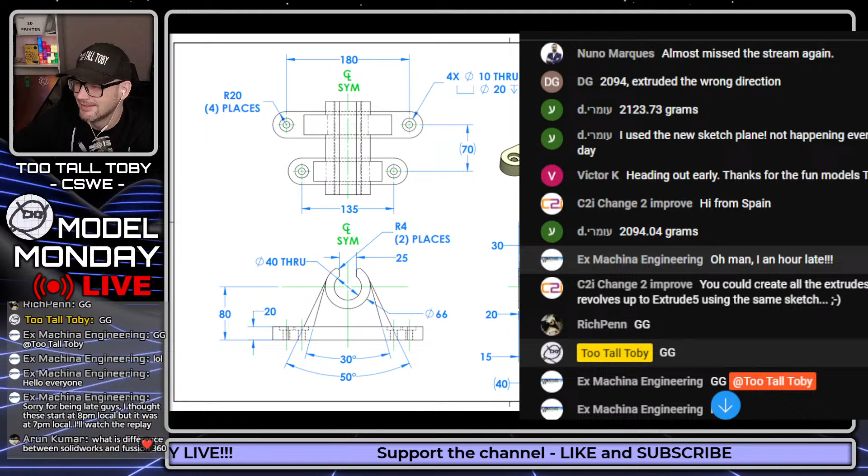Dom came in pretty early with 2094, very nice. Victor K, 2094, says nice work Dom. Ricardo Jean, 2094. Airwick, 2094. DG coming in with 2489, mixing it up. Oh no, says 2094, wrong direction for the extrusion. Omri coming in with 2123, very nice. Omri revising to 2094, C2i Change 2 improve, says hi from Spain. Yes, thank you Ex Machina, the time change is killing me. I know, sorry bro, it's weird here. We did change times I think 2 weekends ago and it's messing everybody up.

All right, good game, good game. Thought it was 8pm local, but now it's 7pm. What's the difference between SolidWorks and F360? There's lots of differences. Omri says GG, okay good.

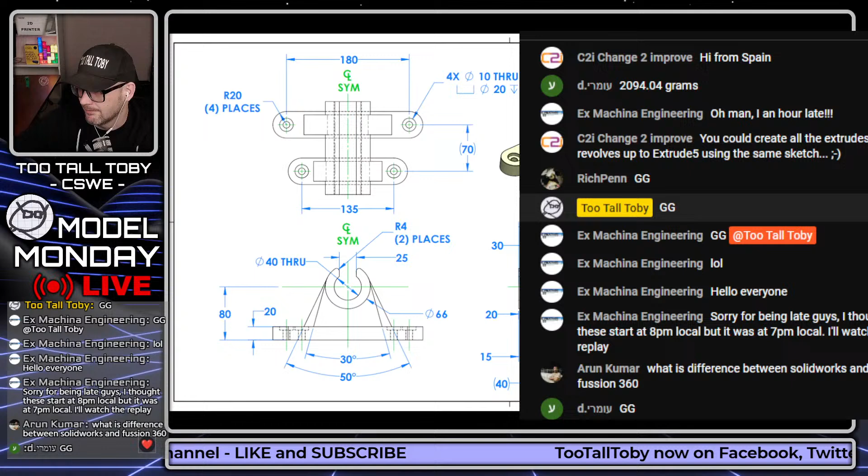Let's see what the correct answer is. 2094, 2094. So this one's going to Dom. Well done Dom, well done Ricardo Jean. Ricardo got the first one, right? I'm trying to think, I got my memory correct, right? Ricardo got the first one. Yeah he did, well done Ricardo, well done to Dom, very very nice.